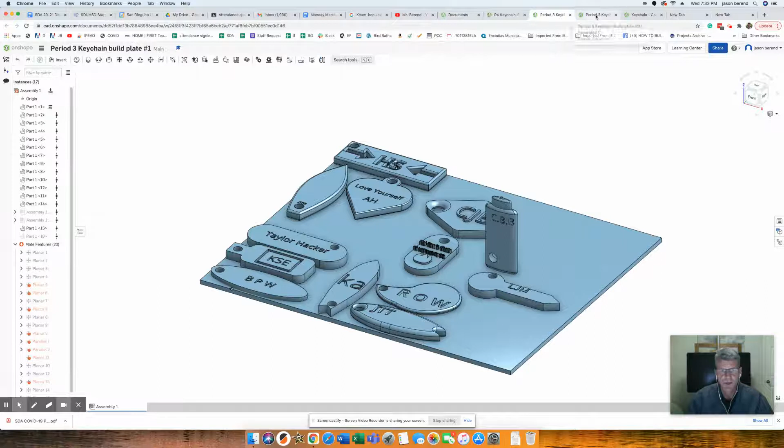But here are some ones from a class from last quarter, so you can get the idea that you can be creative. The only requirement is that you have to have your initials or your name on these, so we can identify who did it and get it to you. So that's the assignment.

And if this looks hard to you, I'm going to go over something kind of similar to this, and you can pause the video and do something similar, and then do something custom after that. All right, so that's what we're going to do right now, and I'll be giving you guys the dimensions that I think would be good.

And it would be probably a good idea to put your initials in the file name. That way we can know whose it is at a later time when we put it on a shared document.

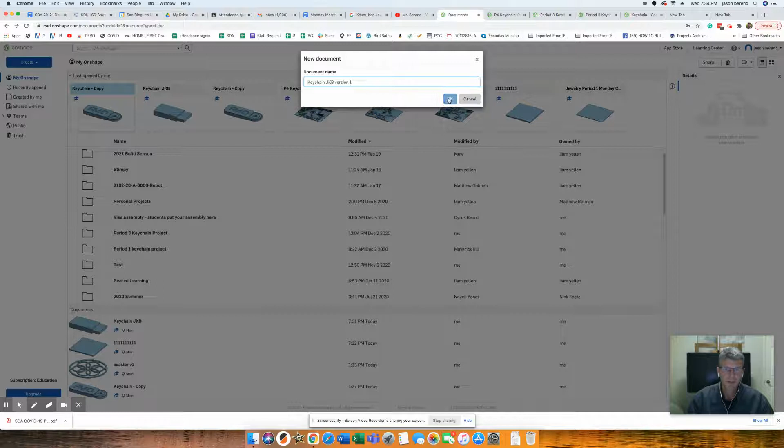All right, so you can design from the top. That's what I normally do, but this time I'm going to do something different. I'm going to design from the front. So I'm going to hit Sketch, click on the front, and I'll zoom into the front. So I'm kind of designing from the side at first.

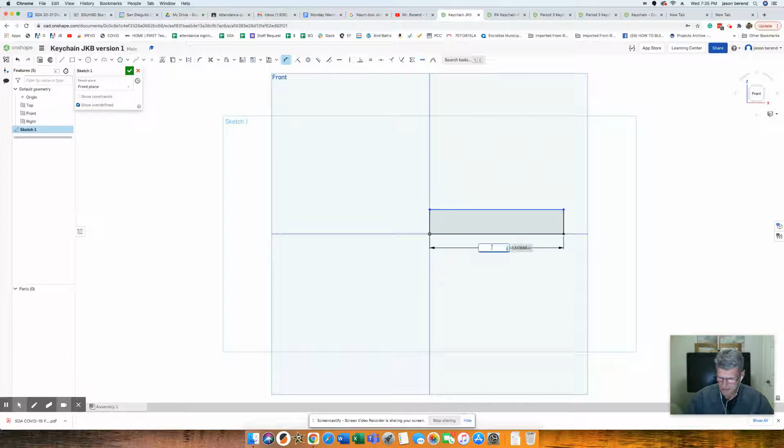Let's say if you wanted your keychain to be, I would say it probably should be less than 1.5 inches long on average, but it's up to you. And how high should it be? I'm going to say 1/4 inch or less. That'd be my recommendation, but it's up to you.

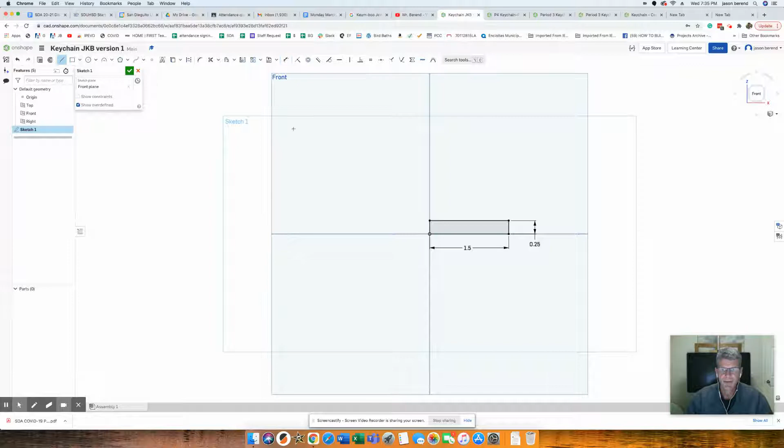On the last one you saw, there was a bit of a profile to it, and I'll show you that really fast and go over a new command too. Let's say I wanted it to go in here, and let's say this line, I want it to be 1/2 inch. And this line here, maybe... that's too much.

So I'm going to do a command called mirroring. And when you mirror, you have to have a line to mirror about. So sometimes I will draw a temporary line, like I can snap to the midpoint here and just draw a temporary line. Let me show you how the mirror command works.

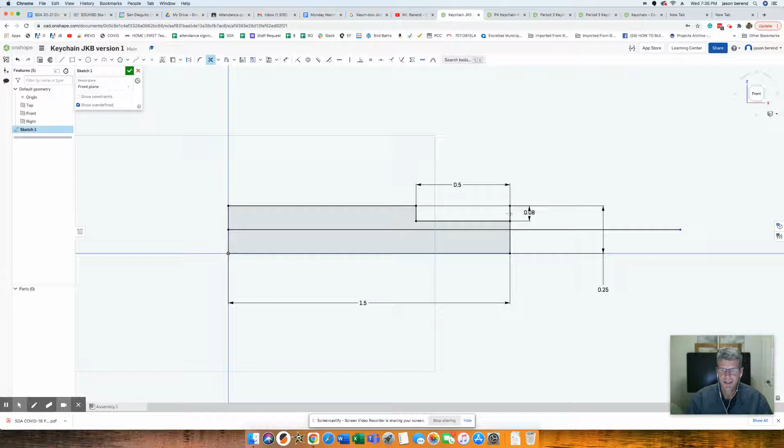Before I do that, let me just trim two lines here. I'm going to trim this line and this line. So instead of drawing these two lines again and dimensioning them, I can just mirror them.

So the mirror command is right here, right next to offset, which we've gone over. I'm going to mirror, it says select a mirror line, so I'm going to click this line. Then it says select entities to be mirrored. I'll click on this line and that line. And so that's how mirroring works. I can press the escape key to end that command.

I'll just trim, I could trim this line or delete it. And I'll trim this line and this one.

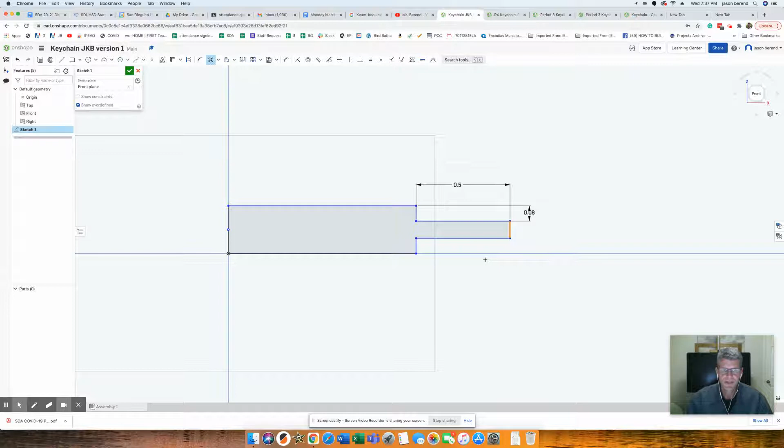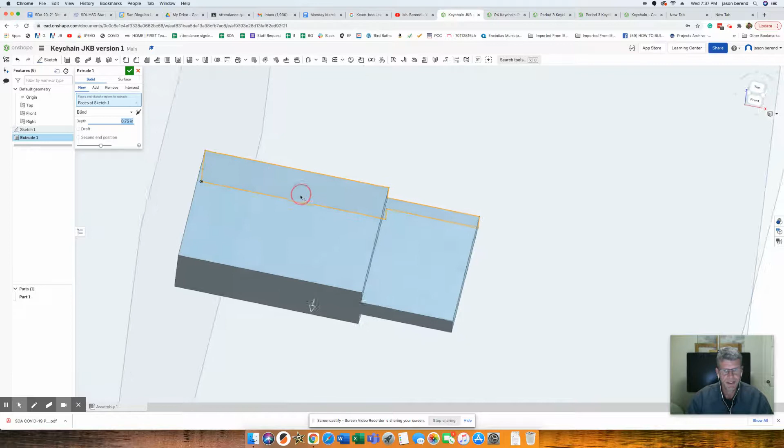So now what I'm going to do is extrude it. So first I'll rotate, and I'm going to say it should probably be 3/4 inch or less, but it's up to you. So actually, I think I should have said probably 1/2 inch, maybe, or less.

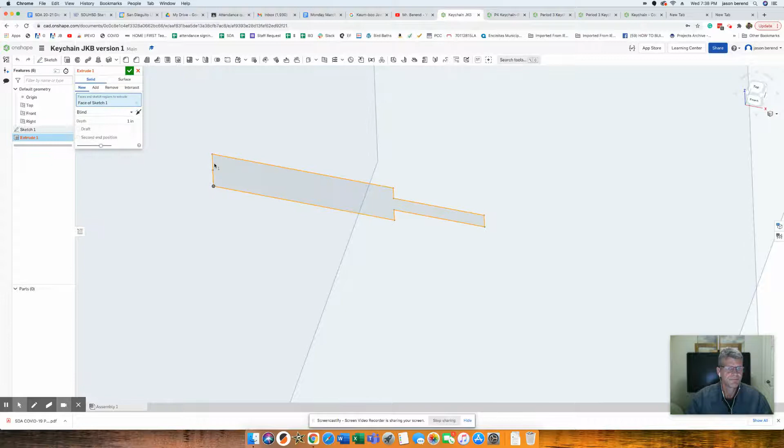So now I'm going to go over a new command. All right, so the next new command I want to go over is called the fillet command.

With the fillet command, you can type in a dimension here, and you can carefully click on corners like this, and you can adjust with the dimension how much you want the curve to be. Now it's 0.2, so if you have other sides you want to do, you can add them.

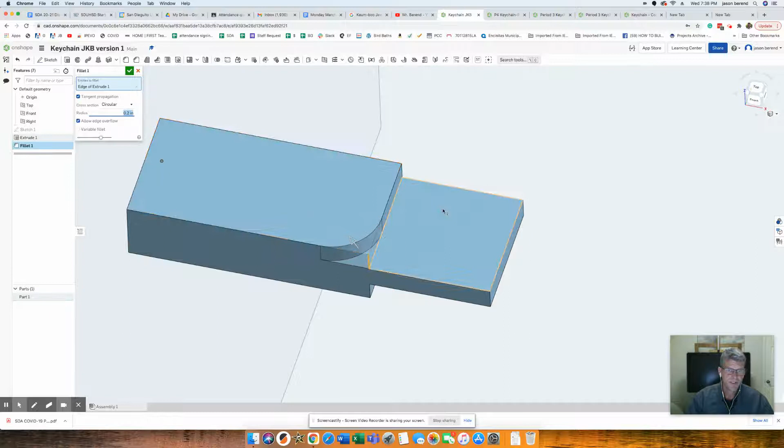So I could click on this one. Notice that populated right there. I can rotate, and I can also get this side. But all I can do right now is 0.2. You can't have different ones. Now I could do...

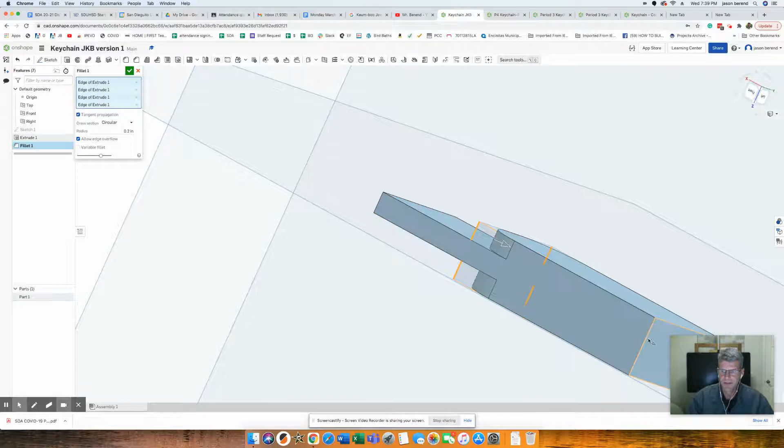Now let me show you what happens if you mess up. Let's say, for example, instead of hitting this line, I accidentally hit this line here. But that's a mistake, I didn't want to do that. You just go up here and hit the X, and that gets rid of the last thing. It's no big deal if you make a mistake.

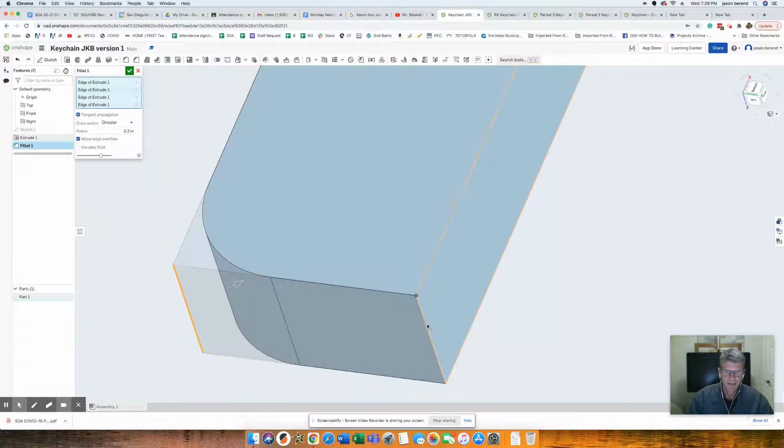So click on this line, and that's everything I want to do for 0.2. So I could hit the green checkbox.

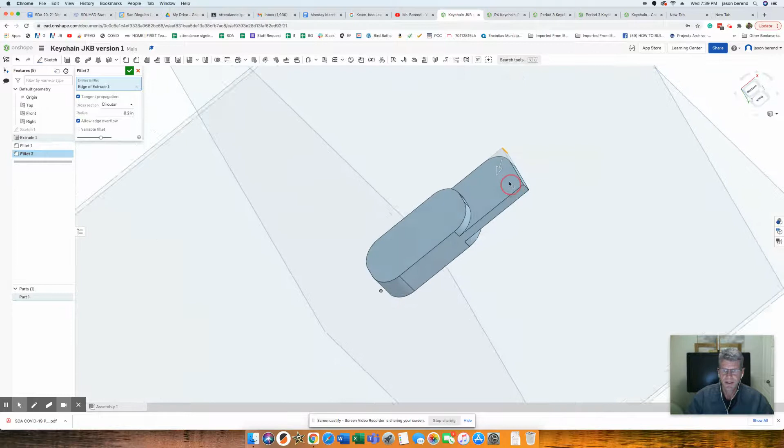I could do the fillet again, but this time I want to do this corner and this corner, but I want to do it something different than 0.2. Maybe this one's going to be, what if I did 0.3? Would that be too much? I could change it to 0.25.

So you can do multiple fillets.

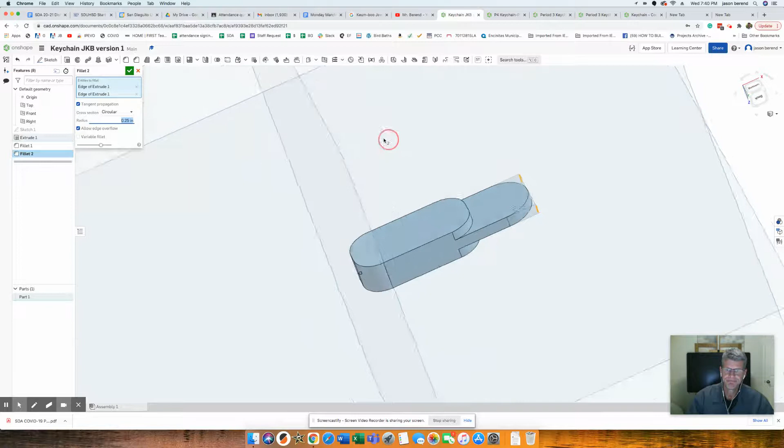And next thing I'm going to do is put a hole. I'm going to go ahead and hit sketch, tell the computer I want to sketch on this surface. And I'll rotate to the top. Right, so I'm at the top, and I'm just going to draw a circle.

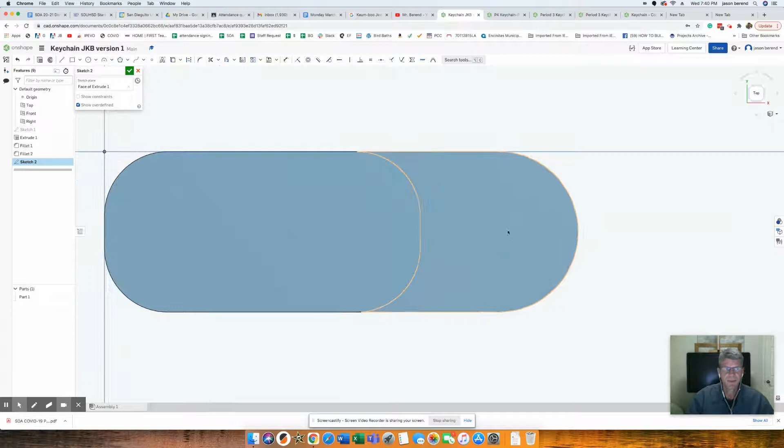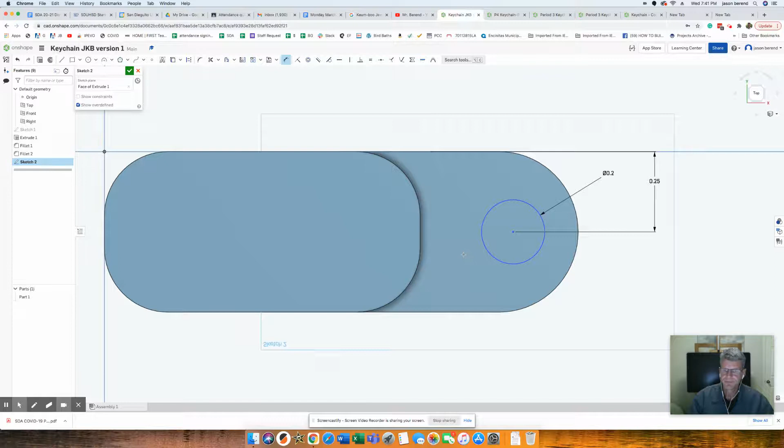And I want it to be about that big. I'll put some dimensions on, first make this be an even number, about 0.2. And I'll dimension this circle, left click here, and I'll left click the top line here. And I'll make sure that it's midway, which in my case would be 1/4 of an inch. Once I have that, I can then go to extrude.

But now, instead of hitting add, I'm going to hit remove.

And if it's going the wrong way or something, you can hit this button, but it's probably going to work for you by just clicking remove. And so that's done. Now you know what the fillet command is.

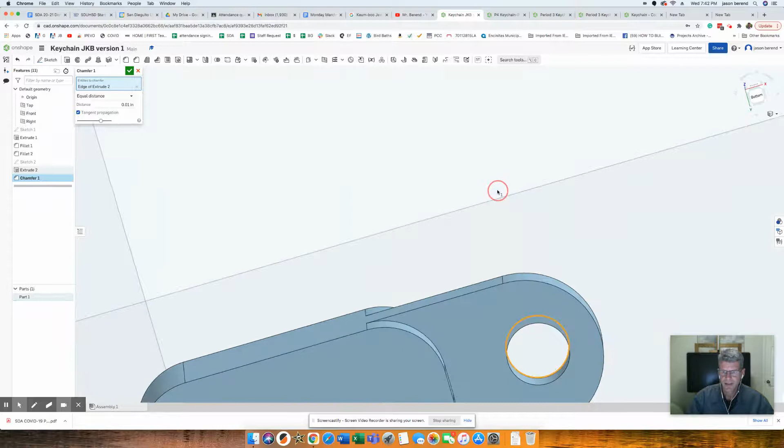The chamfer is similar, it takes sharp edges off things. It's used a lot in manufacturing. So if I do 10 thousandths of an inch, maybe I want to have this have a bit of a chamfer, as well as the other side here. And I'll go ahead and do a chamfer on that line, as well as this line, maybe all along there. Again, it's just taking off that sharp edge.

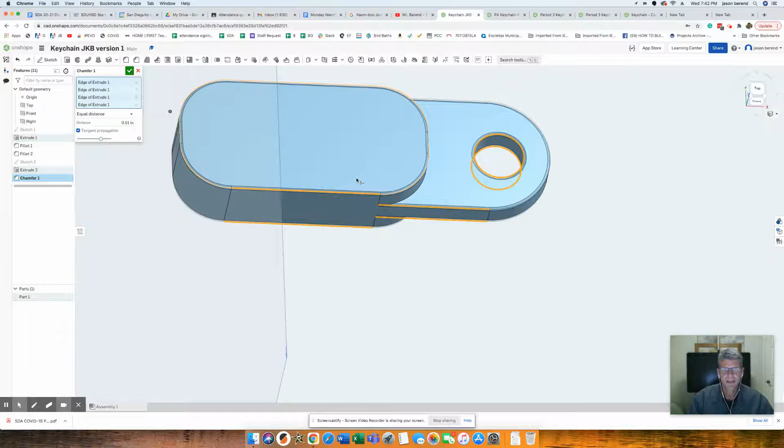Next thing I'm going to do is do some text. So I'm going to click on sketch. I'm on my third sketch now. I'm going to do it on this surface. So I click on that. Here's my text tool, and I'm going to hold down my left mouse button and just kind of draw a window about where I want it to be.

Now when we were plasma cutting or laser cutting, I told you to use this Stencil font because it's really good when you cut things out. But this time you can use any of these fonts because we're not going to necessarily cut through it. So you could pick whatever you want, and you can type your name, your initials, but it's got to be something that can get this back to you.

If I do the checkbox, you can see that it's there, but it's too big. So how can I fix that? Well, if I double click the... let's see, I want to show you something here.

If you want to resize it, that's easy. Just use the dimension tool, click on this line here, and I could type in a smaller dimension. That's how I could do it.

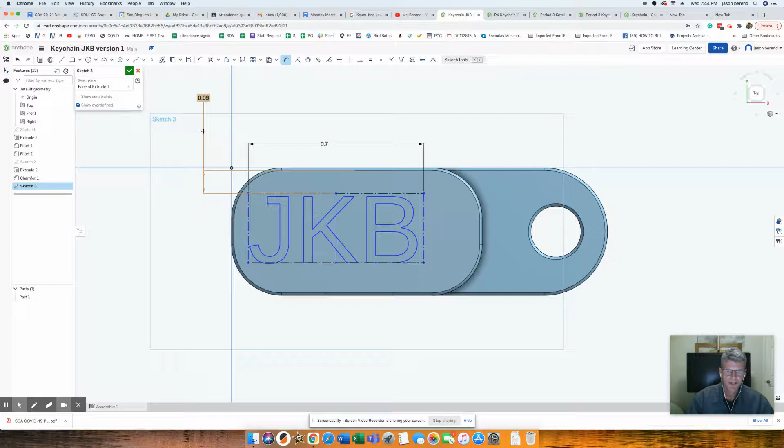If you want to move it around, then you have to click add dimensions in, and that's how I move it up or down. So you can just play with these numbers until you get it where you want. And I can put on another dimension even from right here to right here. And so by using dimensions, that's how you can control where the text is.

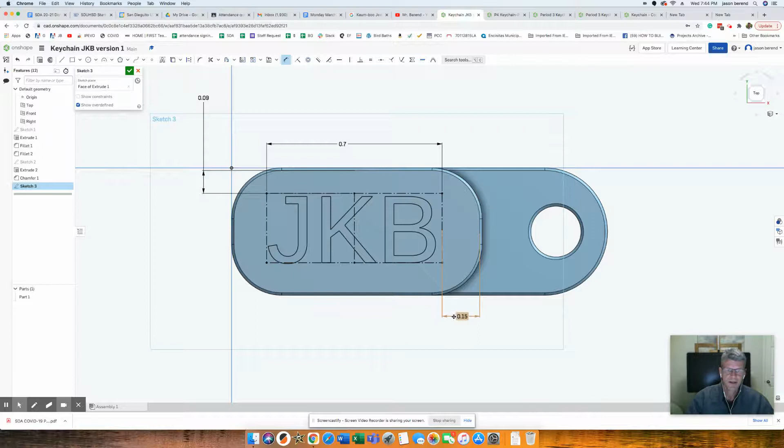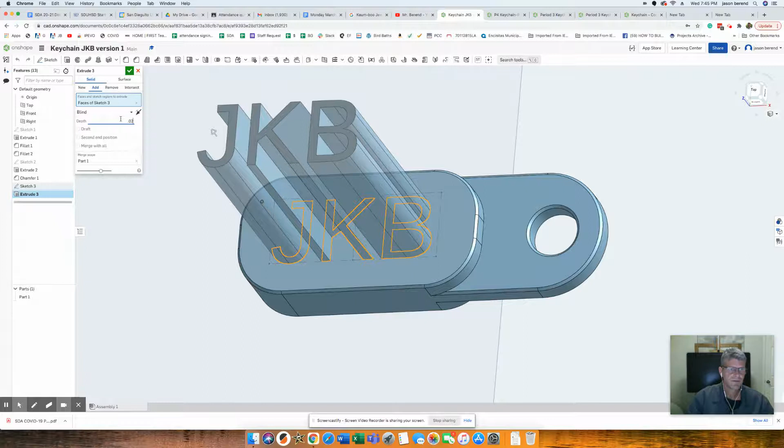Right, so let's say if I like that, then I'm going to hit the green checkbox. So now what I want to do is I could click on Sketch 3 and I could go to Extrude. And you have a choice now, you could have the letters come in or go out. So I could have it be where they pop out a little bit, or I hit this button here.

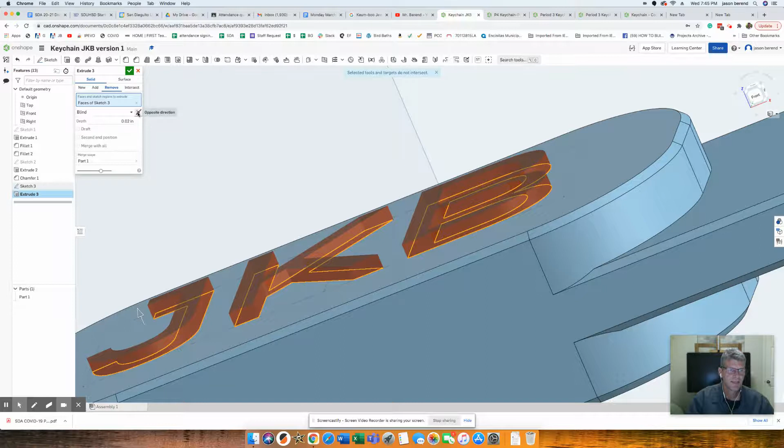Actually, that's not the right thing to do. Or click Remove, and then it would be going in. I have to click this opposite direction. So by clicking Add or Remove, and then clicking this arrow for the opposite direction, you can get it how you want.

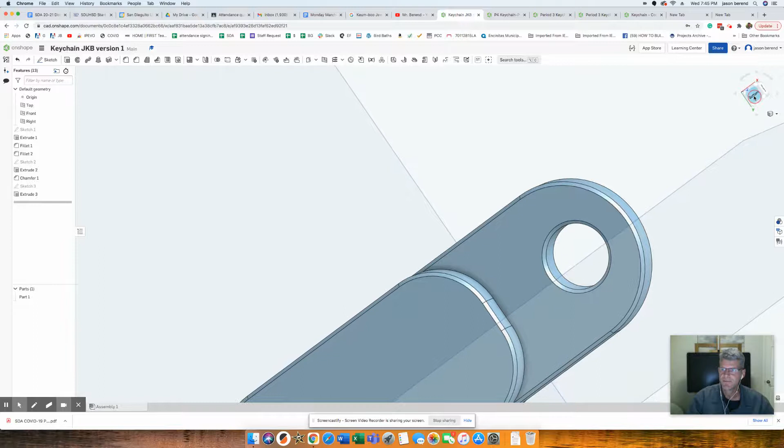So I'll do that, and maybe on the other side, I could do some text too on the bottom. So I'll just go ahead and do another sketch on this surface. And maybe what I'll have here is put a phone number, what if your keys got lost?

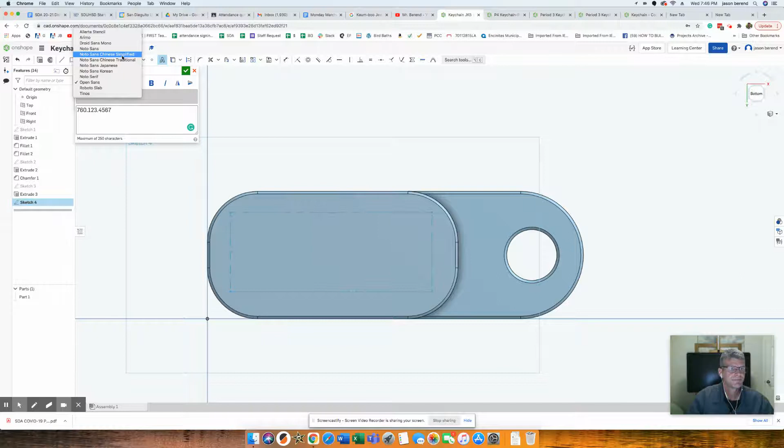Let's try a different font here. Let's see this one. But you don't have to do that, I'm just doing an example here. I don't know why it comes in so big there, but anyways, we'll just add some dimensions and make this work.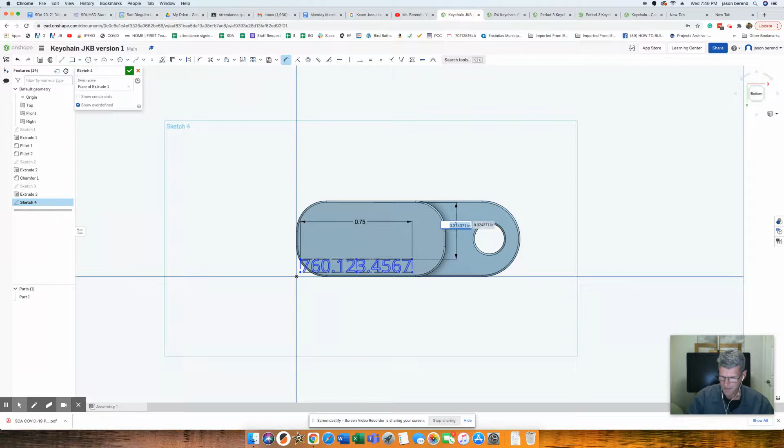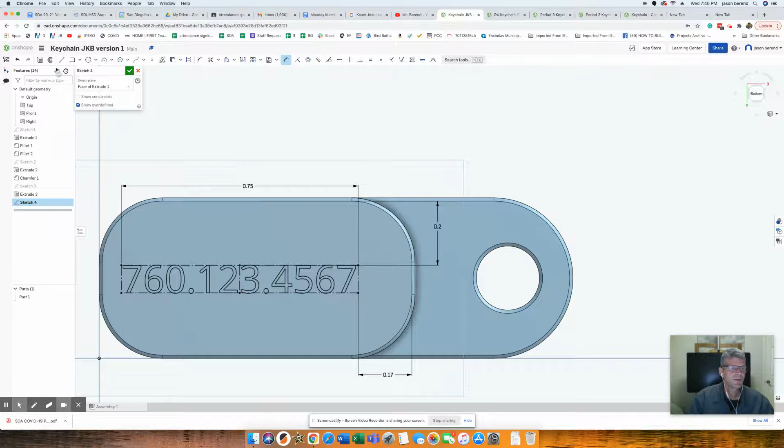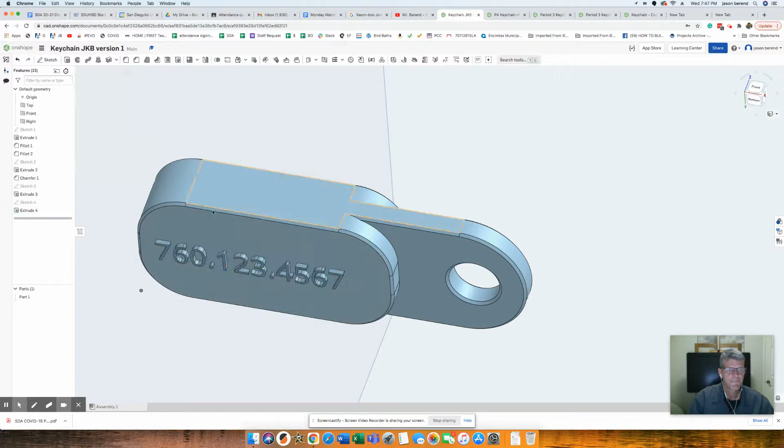So then on this one, I'm going to go over to the extrude button without hitting the green checkbox, it's just a bit faster. And this time, I'm going to have the letters pop out a little bit, so I do 20 thousandths, like that. So that's an example of doing a keychain.

You could design the same keychain 5 different ways, more from the top plane, lots of ways to do it, but at least you have a basic idea. And don't forget that at any time, you can go in and make a change to your sketch.

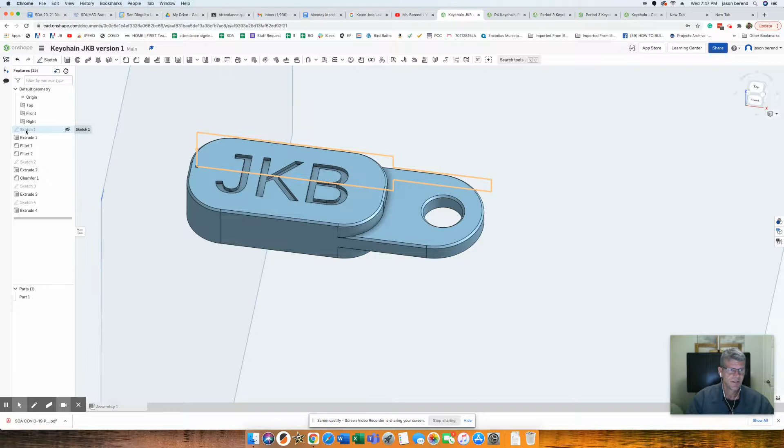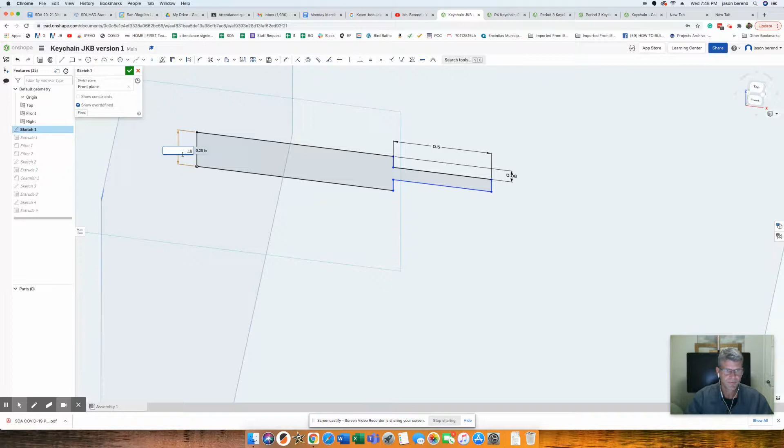Sometimes it'll cause some errors. So if I go into sketch 1 here, and maybe I decide I don't really want it to be 1/4 of an inch, I'd like it to be less than... you can add a dimension in if you want. Sometimes if I click it here, if I do go to 0.08, I have to come back over here and make some adjustments here, which is no big deal.

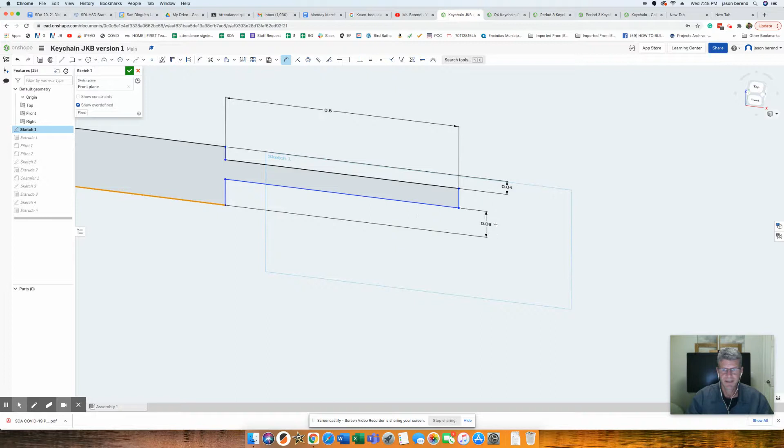So my point is that you can change things. I could dimension these two lines and have this be 0.04. So quick trim here, when you do make changes, you might have to do some things. So if I do the green checkbox, let's see what happens here. And so you can see that I made a change, and with not too much trouble, I was able to make this thing be less thick.

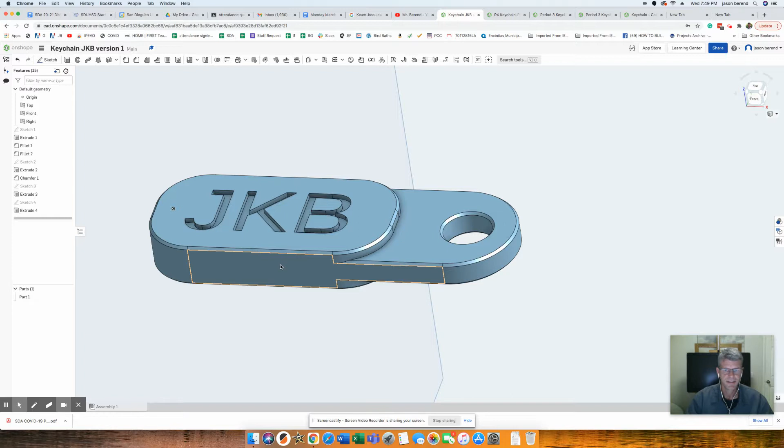So anything on here, you can go in and make a change. Fillet 1, for example, I could say I want this to be a little more, so I'll put a 5 there. But if you type in a giant number, it might go red and you can't do it.

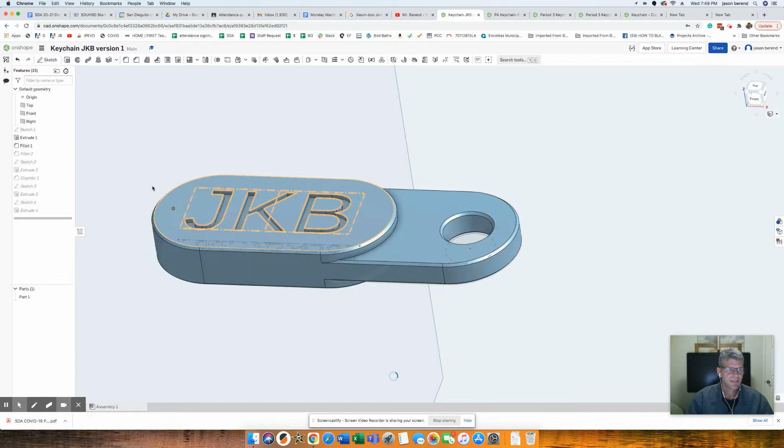But that's how it works with Onshape for the keychain. But do your own design. Don't forget, there's lots of opportunity to be original and make something cool, could even be a present for somebody.